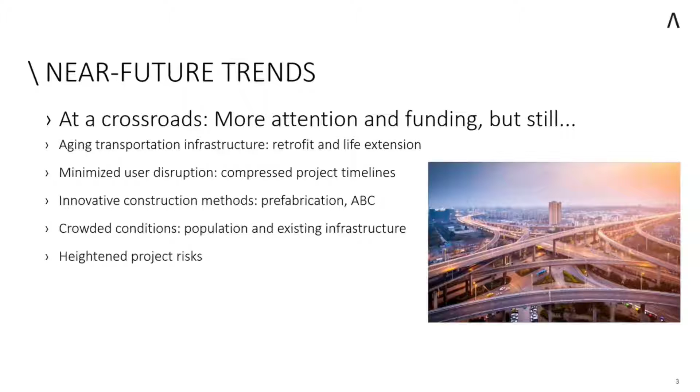The flip side of this, of course, is that these methods are being employed in increasingly crowded conditions, both the population having grown considerably and the existing infrastructure around these bridges that may need to be replaced having grown considerably. So utility conflicts and other infrastructure conflicts, as well as impinging on a great many number of neighbors, is a serious concern. All of this brings heightened project risk. Talking with the stakeholders that we deal with regularly, many of them are highlighting the need to control cost and schedule more stringently than ever before.

We have recently invested a good sum of money into the job of getting a lot of our infrastructure and replacing the most aged bits of it. Nonetheless, there's also a lot more infrastructure out there over the next 40 years to be replaced. That, again, brings increased complexity of design and construction to meet the needs of ABC, prefabrication, tighter fit-up requirements, more automation both in the field and in the shop.

All of this is really intended to allow us to increase worker productivity, both on the design side as well as once we get to construction and fabrication, and even going into the future, better optimizing our allocation of resources for maintenance, asset management, and inspections. That in turn means that when working on crowded locations, using more automation and prefabrication for more complex designs on a smaller footprint, we have a much increased need for coordination and change management, better data exchange, and better data longevity.

How many people have worked on a project where the as-built is a set of scanned, hand-drawn documents from 1955, where everything is illegible, the scan quality is terrible, and we can barely parse out what's there now.

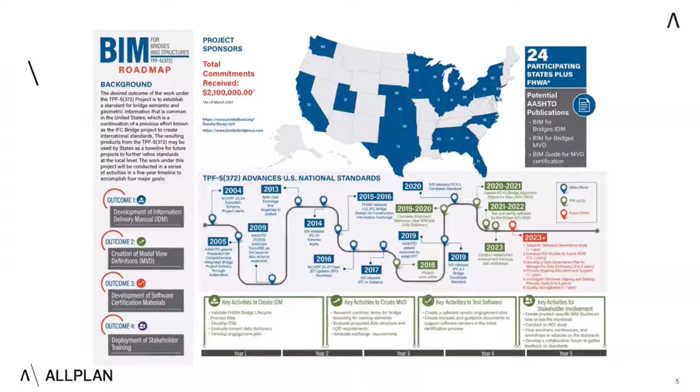Touch a little bit on IFC 4.3 because that's going to be threaded throughout the rest of this presentation. IFC 4.3, IFC being Industry Foundation Class, is a neutral and non-proprietary data format intended to facilitate project delivery in open BIM and open 2D, open data formats. It's intended as a way of allowing DOTs and EORs to work in almost any tool from almost any vendor, pick the best tools for the job on a given project, and still collaborate with one another, communicate with one another, and ultimately deliver into a common file format.

This IFC schema has been greatly developed for buildings. AASHTO is working with buildingSMART and the DOTs to extend that schema to the modeling of bridges to start, and ultimately then from there into future schemas that will include things like roadway, rail, and tunnel.

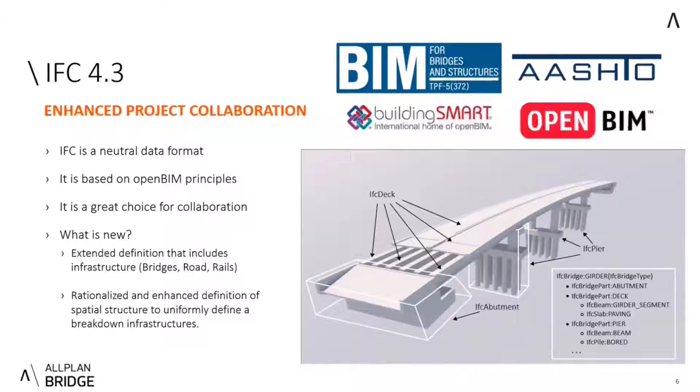At this point, I'll turn it over to my colleague Jalpesh, who's going to discuss what digital delivery is from the engineer's perspective. Jalpesh?

Thanks, David. In terms of digital delivery, David quickly went over why now and ways to get there. So what I want to cover is how our customers today are using digital delivery, using the tools that are currently available on the market.

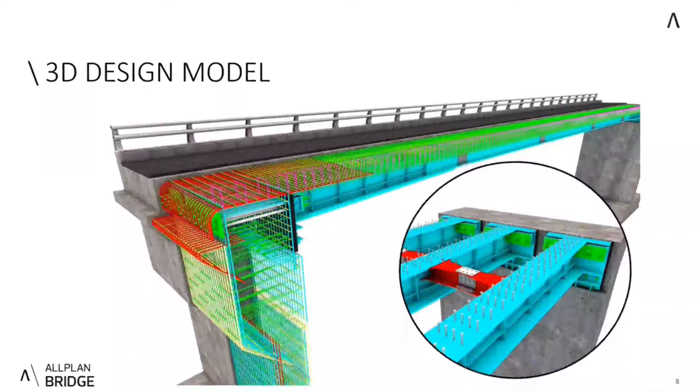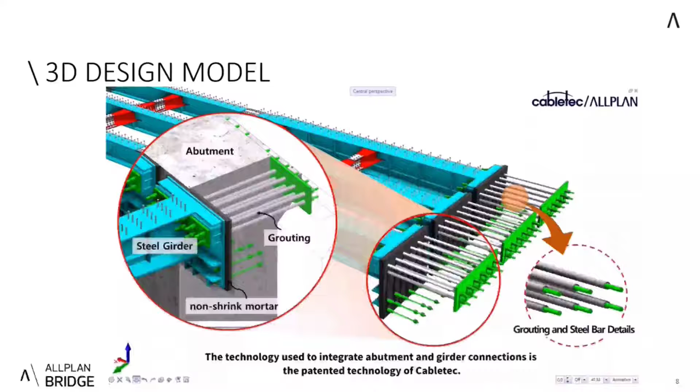The first thing that comes up when you talk about digital delivery for the majority of people is a 3D model. Well, that is correct, but it doesn't necessarily have to be a 3D model, it's a 3D BIM model. A BIM model is slightly different than a 3D model, in that a BIM model has the 'I' in Building Information Model, where the information is the key component that is part of the model. That is what helps make it digital and consumable in various ways.

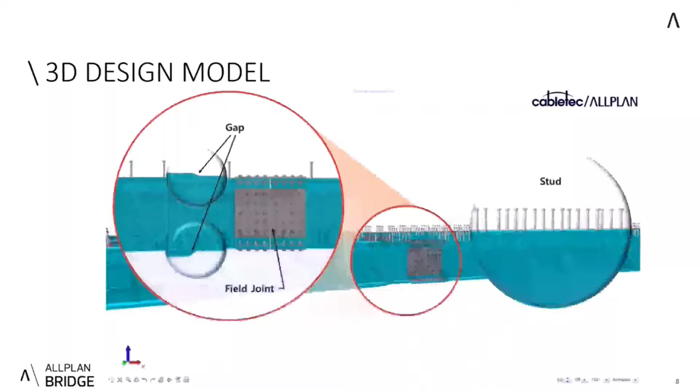So when you create a 3D model, some things you need to be mindful of are the level of information included in it, the level of detail that needs to take place in the model, and also the data structure, because we want the data structure organized in a way where the end receiver of the design can consume the model in a format they're comfortable with.

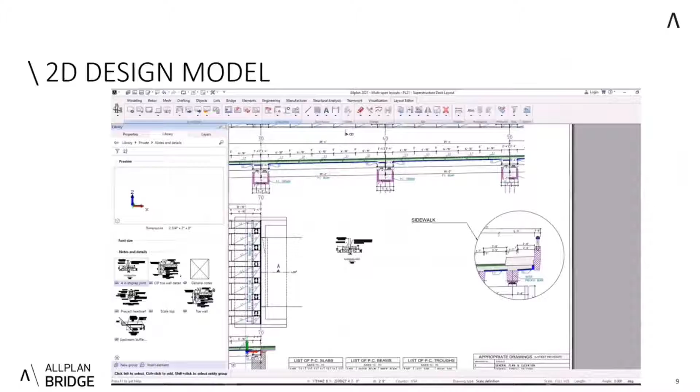So how do we do that? Again, a 3D model is a good starting point where you could put the geometry in a 3D format, but it doesn't necessarily always have to be 100% 3D. We could combine it with a little bit of 2D design as well, or do the whole thing in 2D design. Some examples here are 2D details that we're all familiar with, such as standard details a DOT might have specified.

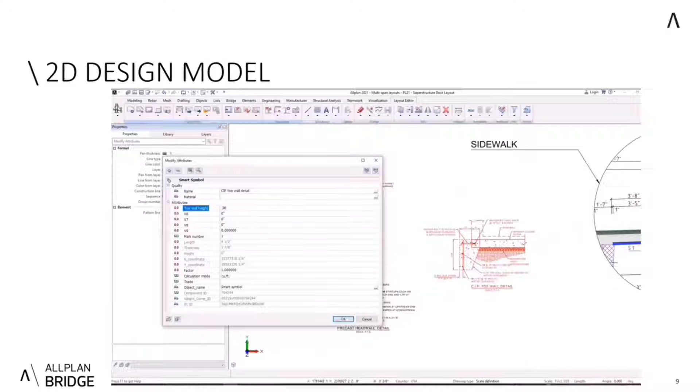What we can do is attach information to it. In this specific case, we've attached attribute criteria where we include a range for the toe wall height. This helps us control the design and also control the limitations of that detail. That information is crucial for digital delivery, because we're not only controlling the quality of the design, but also storing that data in a digital format that can be validated on the go during the design process. Later down the road, we can extract that information when needed for different tasks.

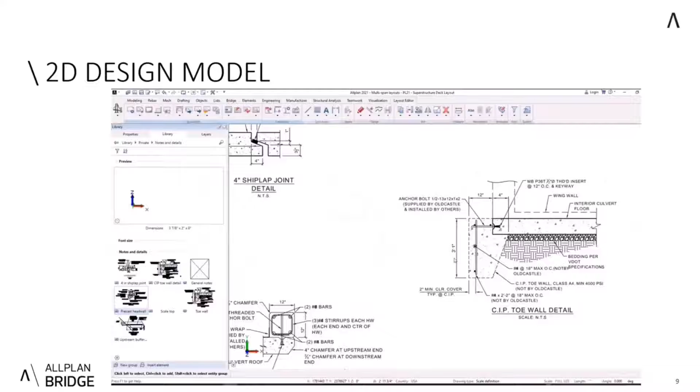Once you have the 3D model, the benefit of a 3D BIM model is the visualization that can be generated for it. Having that third dimension puts a whole new twist on design, where you could use that data in multiple formats in different ways than you would be able to if it was just 2D.

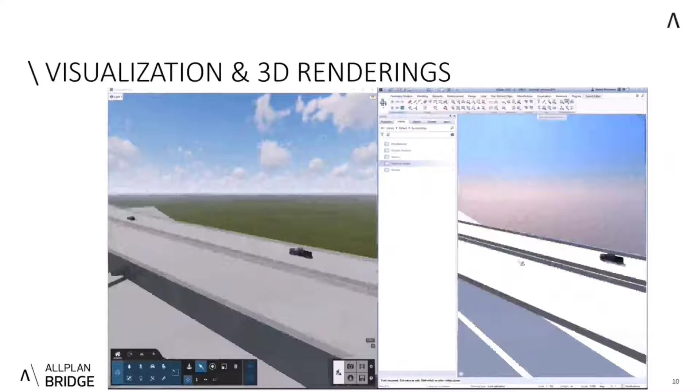The 3D component makes it so realistic that we can integrate with other platforms that project teams are already including in their design process. A perfect example here is the design team modeling the bridge and coming up with the layout and design on the right-hand side in ALLPLAN, where they're mainly focused on the layout of the bridge and the material properties, as well as the detailing and structural stability.

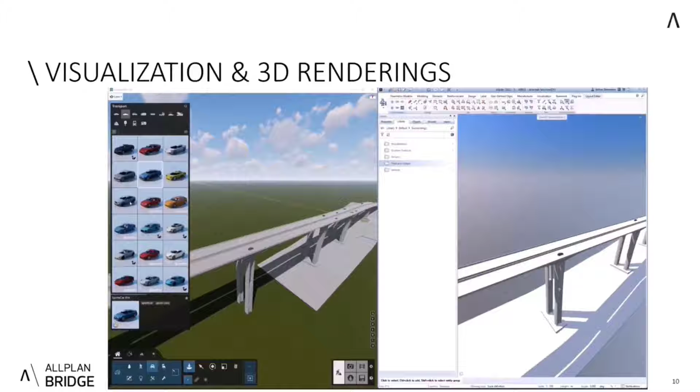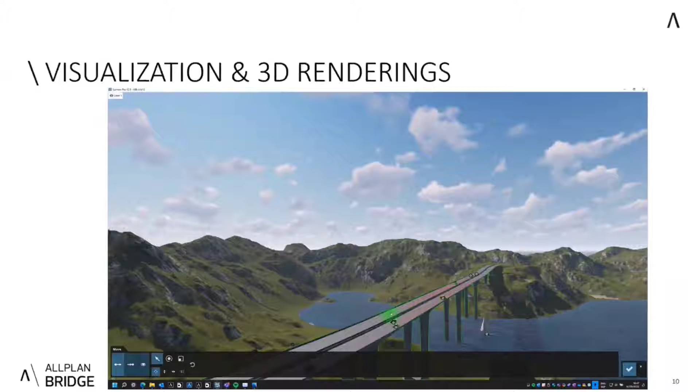At the same time, we have other aspects of design that play into overall project delivery. One of the main things here is doing renderings and visualizations for community engagement, to make sure the client understands what they're receiving and the community is on board with the final product. And what we do many times here is create 3D renderings.

The key thing is if we could utilize that same model to do those renderings, we want to do that as much as possible, because it helps us improve efficiency and accuracy. I think that's a theme that's been threaded through almost all the conversations we've had with folks in the industry - we do all of these things anyway, we just do them separately and at great expense.

Exactly. And right here is another quick example of that same process. We usually go through a design process, create our design plans, sign them off, and then send it to the contractor, where the contractor will coordinate that design with the manufacturers for the components needed for construction.

If we were to define all that design digitally in terms of a 3D model or a 2D detail with attribute data relevant for those components, we could reuse them without having to regenerate that information.

In this example, we were able to take the 3D model, and the 3D model had a detailed model of the reinforcement, which included attribute data in terms of rebar shapes, type, and all the necessary information needed to generate that reinforcement or manufacture it through a bar bending machine.

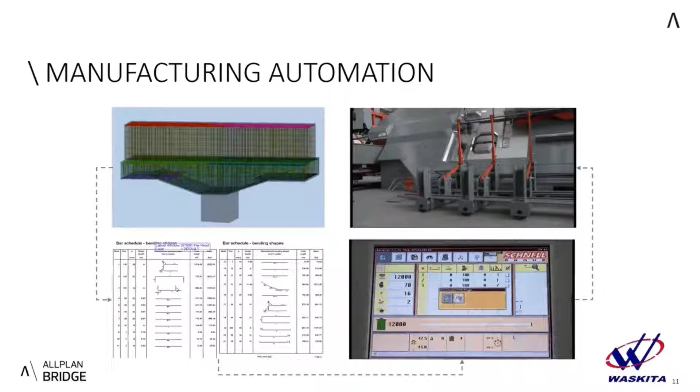What we were able to do, because the information was available digitally and not in paper format, is manipulate it into a format that a rebar bending machine can understand. So again, that data flow was maintained - we took the 3D model directly through ALLPLAN, creating an output file understandable by the bar bending machine.

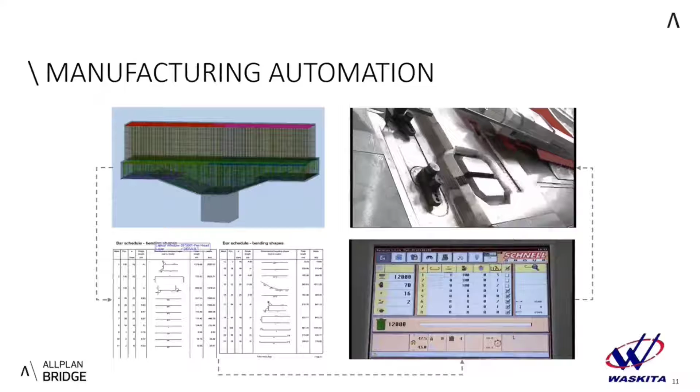So at the end of the day, what we're seeing in 3D virtually is what we're producing, and we've validated that design in 3D because we had that third dimension and basically did a virtual construction of that element. Which brings us to the next topic, the review process.

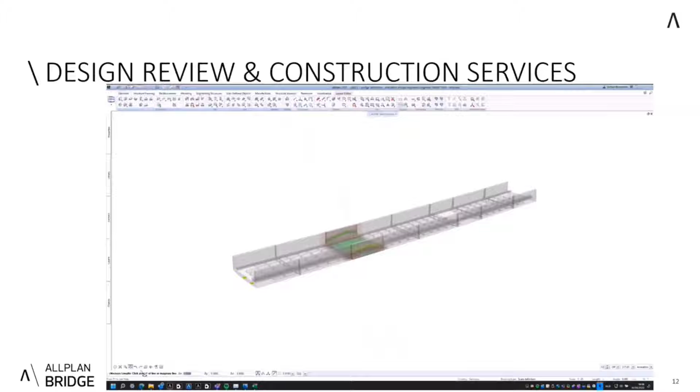The benefit of a digital model is we want to review it and use the attribute data and metadata behind the model to make educated assumptions, as well as define construction elements in a way that the design is constructible. In that process, we go through a lot of different variations in terms of how we review that design.

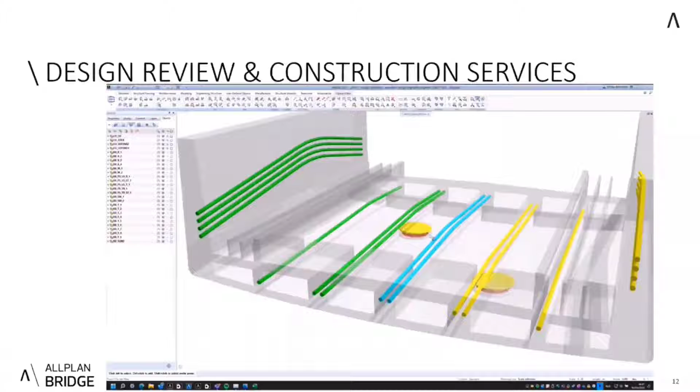Different components of the bridges are reviewed by different parties in the team, so sometimes all the information plopped onto a sheet might not be relevant for them. The benefit here is if you have a digital model and attributes associated with those models, you could quickly filter it and create views which are relevant for the reviewer.

In this case, the main focus was just tendon geometry review, and they were able to go down to the tendon geometry and hide the other components to see how that geometry interacted with the other parts of the bridge. Additionally, you're able to turn on those components, like the example here where we had the reinforcement turned on, where we could see the coordination between the reinforcement detailing and the tendon geometry.

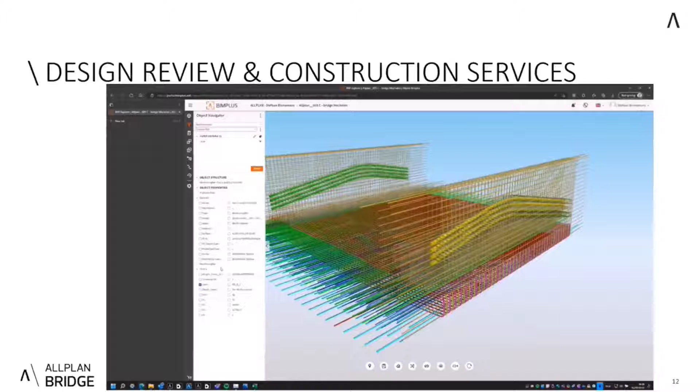The benefit here is you could see on the left-hand side, we have access to multiple ways of consuming this data through different filtering methods. In this model, the reinforcement has been segmented into different layers, and we could turn those layers on according to that placement. This helps us understand how that placement is going to take place in the field and the conflicts it might entail with the current design.

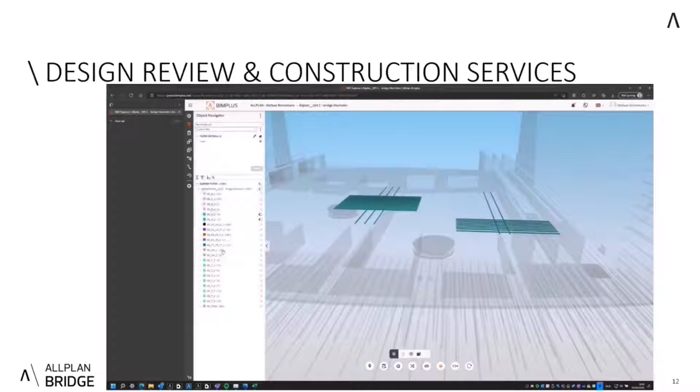The additional benefit you could get with this data structure is that we could share the same information in the field, and the field engineers and the contractor can see the sequence these reinforcements need to be installed in. If there are some conflicts, they could be aware of it ahead of time, so they could contact back to the design team and get validation and verification in terms of the intent of the design.

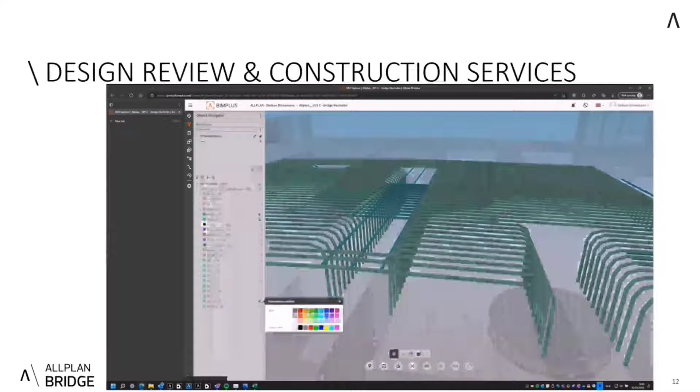Over here, you have that flexibility of consuming that information in a manner that you're used to, or you could create customized workflows from that digital data in a way that is relevant for your field or your segment. A quick example here, they're using that same model.

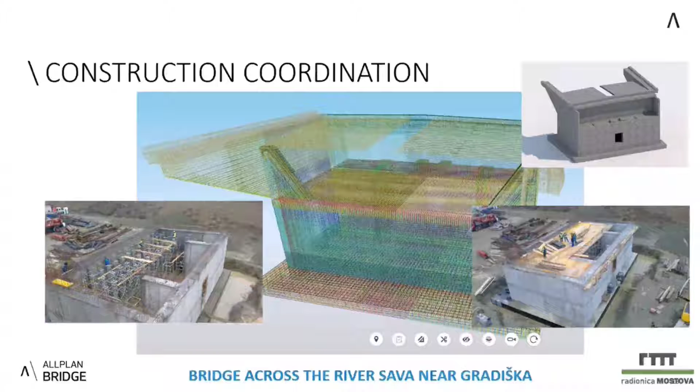Again, what we were seeing earlier was a Bimplus platform, which is available online. The key benefit of the Bimplus platform is that because it's a URL-based platform, it is accessible anywhere in the world. So the contractor in the field, the designer in the office, all have access to this model in a centralized location, and they could share information and collaborate as needed.

And this helps out in the construction site, making sure that transfer of data from the office to the site is streamlined and accurately available when needed.

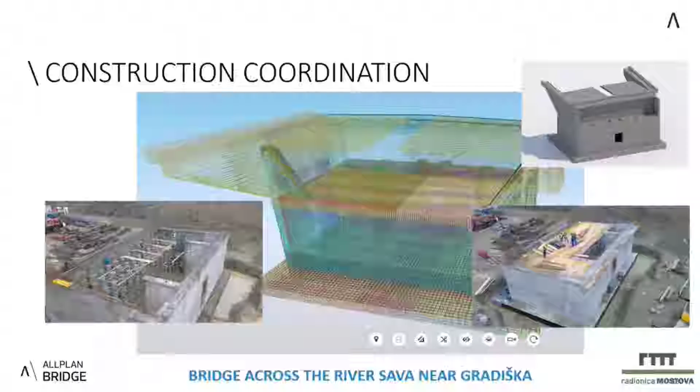So far, all the examples we looked at, when we talk about digital delivery, people have an assumption that all of this is implementable only in new construction. Well, that's not the case. We could also do that with existing structures.

Different formats of digital information include point cloud or LiDAR scan. In this example, we were able to do a LiDAR scan of an existing structure that had to be modeled within our BIM environment. That way, we could do some coordination of modifications on the existing structure.

This would be the same example if you were to model as-built for an existing structure, if you wanted to do, let's say, a deck widening or some rehab that needed to take place. What we can do is first do a LiDAR scan, which provides our survey data and the geolocation of all the different components that make up the structure.

Then with our partners at Scalypso, we were able to coordinate the placements of these elements in the 3D geolocation and build a digital twin almost within ALLPLAN. You are able to select elements within the point cloud to place your elements, and then a 3D model was generated in ALLPLAN, similarly to what we saw with the visualization, where we had ALLPLAN on the right-hand side and Lumion on the left-hand side, and we were able to integrate seamlessly.

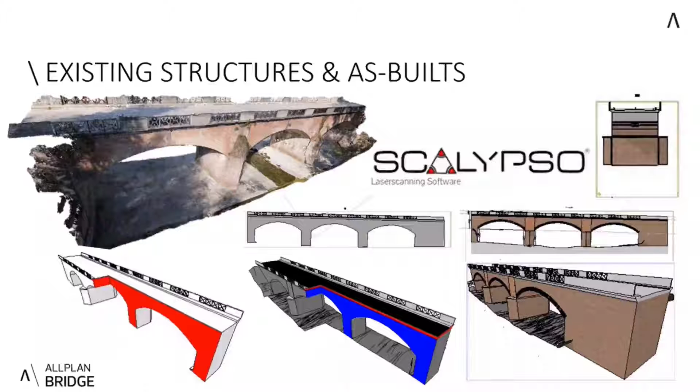Amusingly, I was just having a conversation about this yesterday, and I was under the impression that we didn't have a good workflow for it.

So back to the customer. What we want to do here is make sure that we understand the true meaning of digital delivery. Yes, 3D has a big component, the BIM aspect of it, but there are multiple formats this can be achieved in. A good example here is a recent pilot project we're about to wrap up with our partners at Pennoni and DelDOT, project 1-447 over Taylor's Bridge Road.

The great thing I like about this is that their focus was all digital delivery and how far can we take it. This also didn't have a specification that it had to be done in a single platform. It was more like, how can we use the best tools available on the market, tools that the teams are comfortable with, and exchange data in an open format.

So over here, we have a quick example: on the left-hand side, OpenRoads, and on the right-hand side, ALLPLAN Bridge. The team was able to coordinate the two models seamlessly with each other through the open data format IFC. Additionally, for information that was not possible to transfer through IFC, we were able to do that through a native format that ALLPLAN was able to generate as a 3D DGN.

The great thing here is that we could do some volumetric checks. They have an existing bridge in place, so they were able to produce volumetric clash detection against an existing structure and make sure that layout was sufficient for constructability reasons in terms of clearances from existing structures.

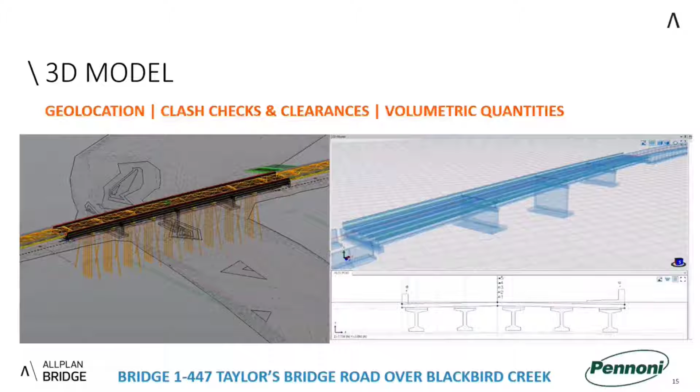The open format of IFC and the native file format of DGN, both of which can be exported from ALLPLAN, played a big role in that collaboration effort of using multiple platforms of preference while still having the ability to streamline the data exchange workflow.

Further, we were able to take that BIM model, and again, it was not just a pretty 3D model, it was actually an intelligent 3D model where the detailing was also done in a sophisticated manner, with a lot of attribute data associated with those elements.

When we create plan sheets, we have a bunch of notes that come into play. That same notes can be applied to an attribute set within ALLPLAN. And the benefit of that is that the attribute data can drive some of the production, the 2D production that is still

necessary in today's world. In this scenario, we were able to automatically generate our quantity tables and rebar schedules from the 3D model and the attribute data associated with it.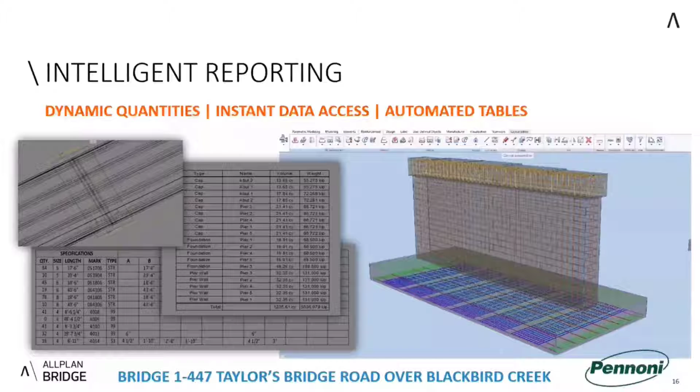That streamline of information makes sure the information is flowing smoothly from one process to another, and then you truly have a centralized model. It's not only within ALLPLAN that you could consume this information, you could actually export it to other formats like Excel or Word to create customized reporting as necessary.

And then, of course, the 2D plan set. Plan sets are here to stay, the whole industry is accustomed to this process. There's going to be portions of the process in your digital delivery that will have to be accomplished in 2D, so we want to make sure we have that functionality as part of that workflow. Yes, we have ambitious goals of going 100% 3D, but it's still time before we get there.

So again, we keep that in mind. Digital delivery does not mean a 3D model. It means a way of providing the design intent in a manner that the information can be consumed by the receiver in a way they're accustomed to. So it could be 2D, it could be a 3D model, it could be a rendering, it could be a 3D PDF.

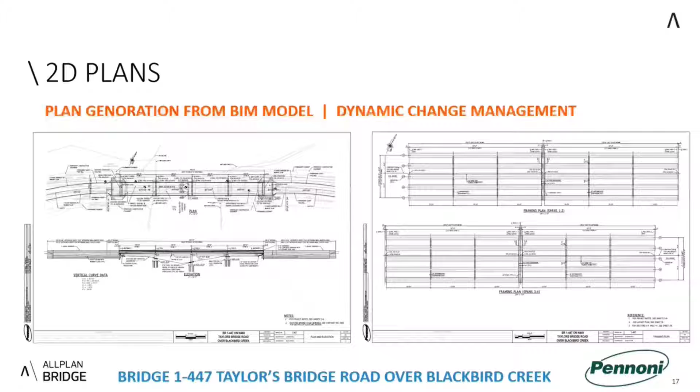All of that is possible when you have a data-rich BIM model, which we have in this case, where we were able to take that centralized 3D model and create our reporting in tables, as well as these sheets that we see right here. A lot of these texts and labels that we're seeing in the plan sheets were automatically derived from that attribute data, along with these tables.

So you could pull northing and easting elevations, true elevations from the model, and that way you have a realistic virtual model of the design available to you. And you could start reducing risk and get the deliverables that are necessary at the same time.

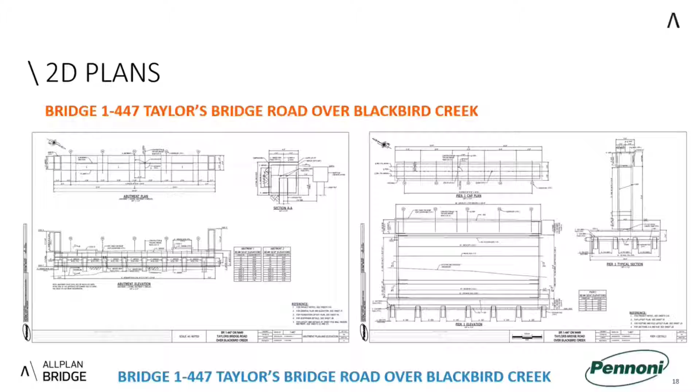So you're not adding work on top of it where you're doing a 3D model while also having to do a parallel 2D workflow. No, we have a 3D workflow where the plans are the byproduct of that 3D workflow, and we're not generating them on the side, which is the true power you get from a digital design, because that data is available digitally, and then we can generate any output that we want in a format that we need.

To get more into what the ALLPLAN environment is, we're actually going to do a quick webinar coming up in the near future where we'll walk through this workflow. But I wanted to give you an idea that there are multiple options of going in and out of a workflow, which is what makes digital delivery powerful.

That data can come into different platforms and leave the platform when needed for a specific task. In our scenario, we have three core platforms, BIMPLUS, ALLPLAN, and ALLPLAN Bridge, which are all integrated with each other. During the design phase, we could take that data back out of this environment into a different workflow. More on that coming up.

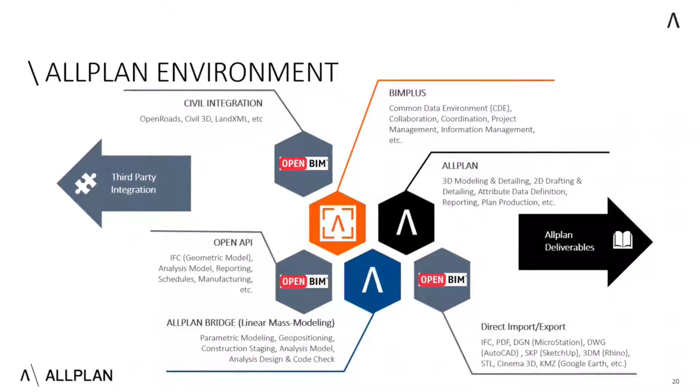So if you're not already submitting deliverables as IFC models, then producing an IFC model will probably seem a little daunting. Thankfully, with ALLPLAN Bridge, we're working to make sure that the process of creating an IFC model and more digital deliverables is as seamless as possible, and to a large extent occurs naturally throughout the modeling process.

Even from the start, every time you start a new ALLPLAN Bridge project, one of the first things it asks you after where to save the project is what the IFC bridge type is. You can choose from a list of selections here, choose not defined, or even your own user-defined option. You'll see these drop-downs a lot throughout the process.

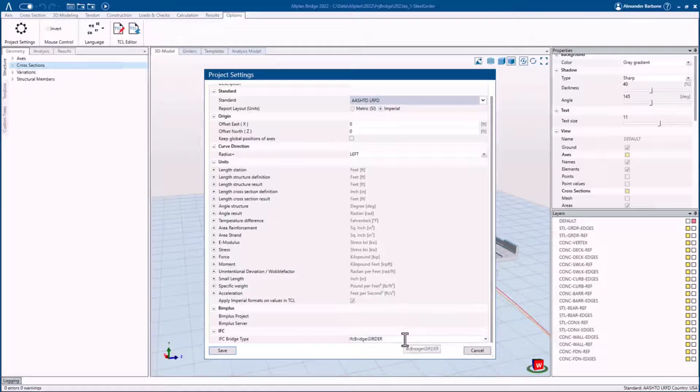Of course, even if you started your model and didn't include this to begin with, you can always change it simply by coming here to the options and project settings. Besides all the values associated with the units you're using, down at the bottom here, you'll see an opportunity to specify or change the IFC bridge type.

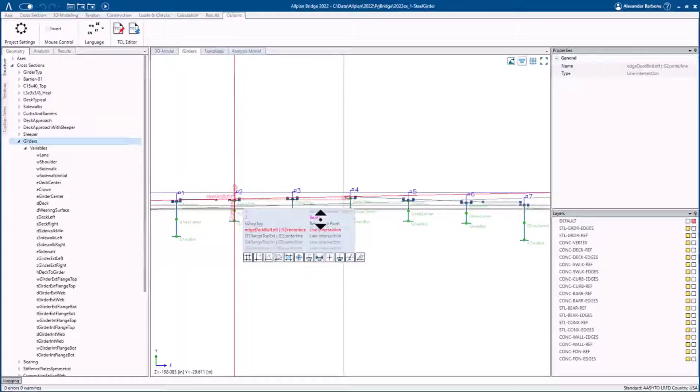So you'll see opportunities to enter the IFC entity values throughout the modeling process. For instance, every time I create a new structural unit in a cross-section, I have the opportunity to specify what the IFC entity value is. Let me select one of these beam values. We can see in the properties over here, I have an opportunity to enter the IFC type and the IFC name, and we'll notice these include a large variety of built-in options.

You'll notice for a lot of these there's a user-defined option. It's not immediately obvious, but you can actually edit all of these values—they're just a string of text that you can edit. So if you want to choose an option that's not included in this list, you're free to enter your own values. I do want to change this one back to beam, however.

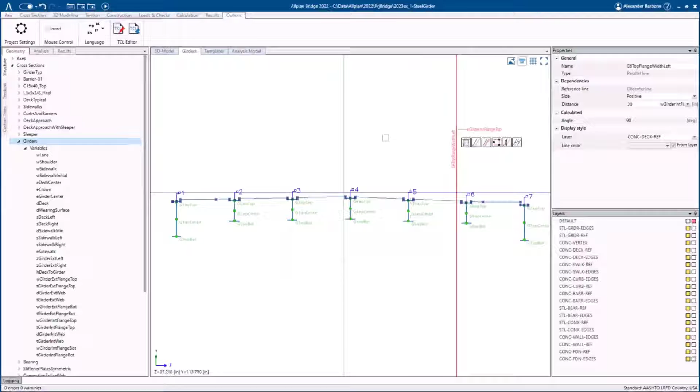You'll see these show up again when you start the project as you're creating your cross sections, and you'll see them when you create structural members as well. Let me come back here to the 3D model and select, for instance, these steel girders. You can see here, coming to the properties, I have the opportunity in this case to enter the entity value for the IFC bridge part type. Again, we try to make this process as easy as possible and make suggestions to you along the way for what are appropriate values.

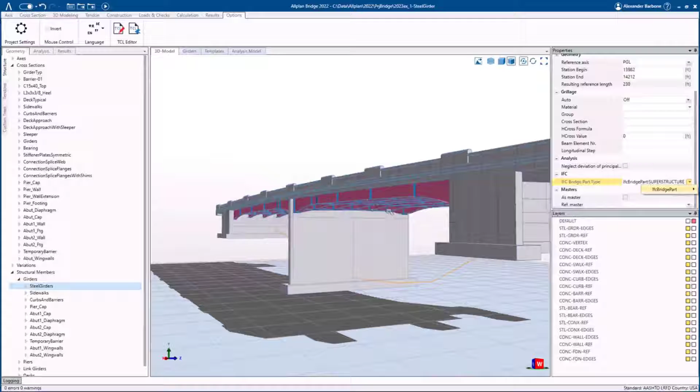So you can see these are showing up just in the properties palette as I'm selecting objects—they'll show up throughout the modeling process simply by interacting with the objects. It's not like I have to go to a hidden menu somewhere and specify all of the IFC values at once, or create a configuration file. I can just plug in the values as I normally go about the modeling process, and that's especially helpful for engineers and designers who aren't experts in the IFC data schemas.

Just follow the prompts on screen—it's really that simple. And if you're breaking up who's working on which parts of the model, then you also have the opportunity to have the people creating those objects choose the appropriate IFC values.

So you can easily divvy up the work rather than waiting until, say, the end of your modeling process where you have to go through and start entering these values. You can just do it along the way. And that's not the only way we're using IFC values.

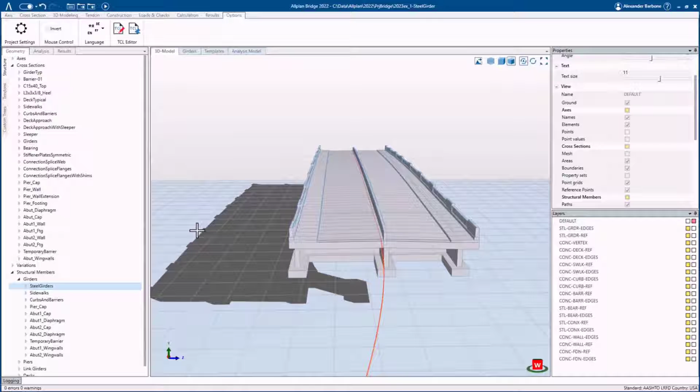Actually, we have a new feature here in ALLPLAN that we're referring to as attribute sets. So this is a really interesting functionality because what we can do here is automatically assign some attributes depending on what sort of IFC object an ALLPLAN object is assigned to. So let's take, for instance, this girder right here. I can see there's already a collection of attributes assigned to this girder.

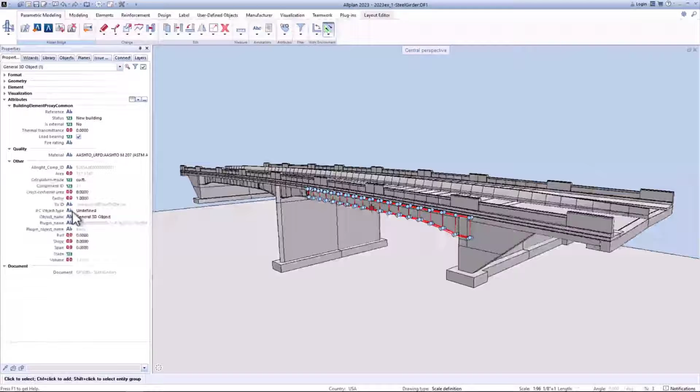One of them you'll notice is this IFC object type. So in this project, I am using attribute sets. So if I were to come here and change my IFC object type from undefined, which is just a default value, to IFC beam, we'll notice that this building element proxy common, this group of attributes up at the top, will change. I'm going to press enter, accept the values.

And when I look at the object again, you'll notice that I have a category. It was replaced with beam common, and I have now a whole list of new attributes. Some of these might be the same because they're fairly common, but I can see, for instance, that I have this attribute called unit weights, and the value is 0. I can also see that there are some other attributes here, major bridge assembly and national bridge element, that aren't correct either.

But now I can be more aware of them simply by adjusting the IFC object type, and then the attributes are selected. So now I can come in here, and this one should be superstructure. And then this value should be a girder beam made of steel. The unit weight of steel, we'll say 490 pounds per cubic foot. Now we can see even my weight is being calculated correctly. So all of that stuff became really obvious just because I'm using these attribute sets.

I already configured them the way I need to for this demonstration, and by changing the object type, I now am prompted to notice that there's a few attributes that maybe weren't populated correctly. So it could have been extra work for me to go through and specify all of these IFC object types to make sure that my IFC model is being generated correctly. But that's not really the case here. This is now part of my quality assurance process. I know that this is just the thing that we do to make sure that we have the correct attributes loaded.

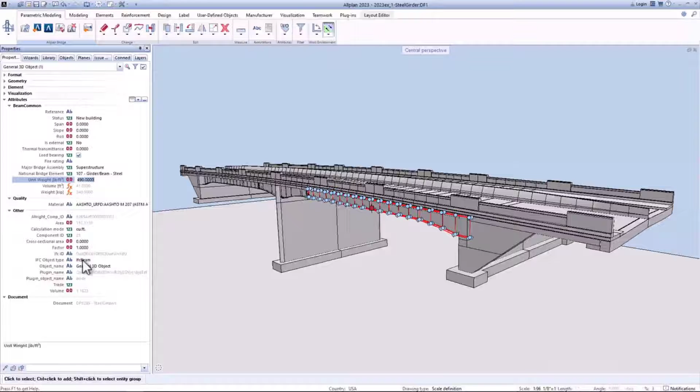Now, these attribute sets are configured either on a project-to-project basis, or you can create one to share between projects. So I can view the properties for this specific project, and I can see that what I'm using here is the Office standard. So this is just the default one for my organization. I can also create project-specific ones. I can use some of these default ones, the IFC common. I can also just turn the feature off altogether by selecting none. And I have the option as well of importing from BIM+.

So this is extra helpful for situations when you have people that are going to be setting up this process. They don't even have to have ALLPLAN open. They can actually manage the whole attribute set process directly in BIM+, and then it can be loaded into ALLPLAN for the modelers that are working in ALLPLAN to specify these values. So you can manage all of this information and set up this quality assurance process outside of ALLPLAN and import that information in. I'm going to keep that at the default here and close out of these menus.

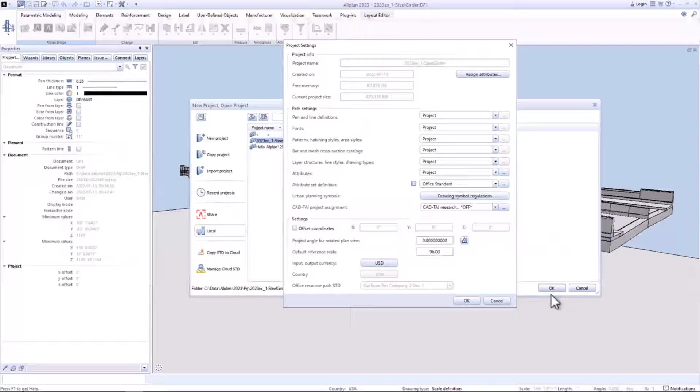And then we'll take a look at, since we're talking about quality, some features for quality control in ALLPLAN Engineering. So we know that, especially for engineers, you have to have a way of performing quality control on a BIM deliverable. And we also know that engineers love their spreadsheets. Thankfully, there is a way in ALLPLAN Engineering to simply export attribute information to an Excel spreadsheet. So I can start the export attributes command, and I can see here I've got plenty of settings. One of the most important ones is this report template.

There's obviously a lot of data involved in this model, and I probably don't want just an enormous list of everything that's applied to this project. This report template gives me the option of selecting which attributes I want to export, and then the on-screen prompts will allow me to select a certain range. The report templates, there's a lot to choose from. There's plenty of defaults here.

I've also created some of my own, and these are very simple text-based files. If I open up the one I'm using for this example, it's just an XML expression. There's a bunch of control lines here and there, but really the only thing that's important is this list of attributes in the middle.

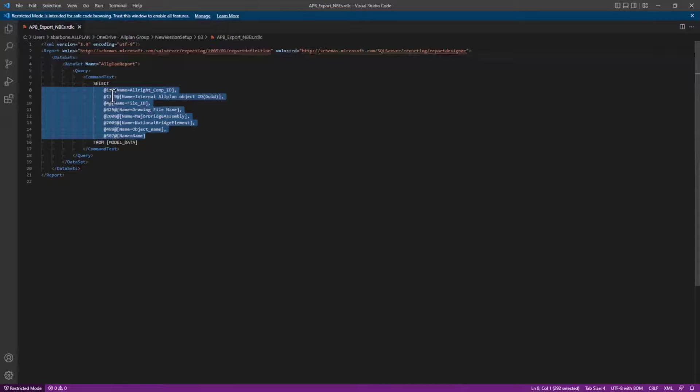The syntax is the same for all these RDLC files during this process. You can easily come in here and just enter the attribute numbers that you want to export and what the names of those values are. Close this and return to ALLPLAN, and I'll indicate that I want to export this information to Excel and then start Excel immediately.

I'll just select all the data. ALLPLAN will immediately export that information to Microsoft Excel, and now I can easily browse through the spreadsheet and take a look at the attribute values that were assigned to the objects that were selected.

So now I can get that information easily out of ALLPLAN, but I can also send it back in. One nice feature about this process is if I notice any mistakes in the attribute information, I don't have to go back to ALLPLAN to change it. I can do that right here. All I have to do is edit the file and import the information back into ALLPLAN.

For instance, I can see that I've got these objects on my drawing file that I know includes only objects for abutment 1, but for some reason they're assigned as a deck slab, and the NBE is indicating that it is a reinforced concrete slab.

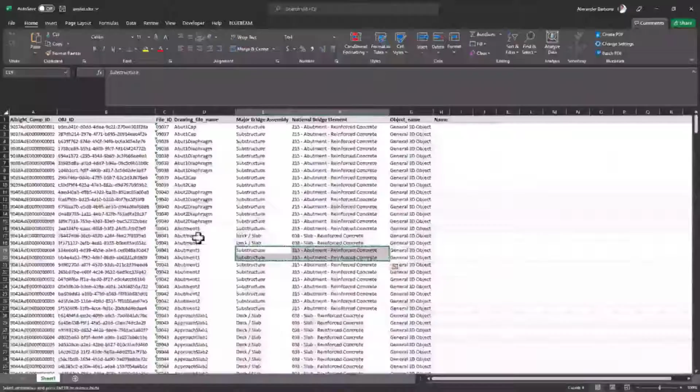So I'm just going to copy the correct values from another object in that same drawing file, and we'll overwrite those. Simply save the spreadsheet, close that down, and then press the import attributes command here.

I can choose that same Excel file that I created moments ago. I'm also going to check this dialog box for comparing data. That lets me take a look at all of the changes that I'm about to introduce, so this gives me one last check instead of just blindly copying in all that data.

Now I can see, for instance, that I am going to be importing this specific information. The attribute major bridge assembly is going to change from deck slab to substructure, and I have the option of choosing whether or not I actually want to import that information. In this case, I know I want to import all this information, so I can just press OK.

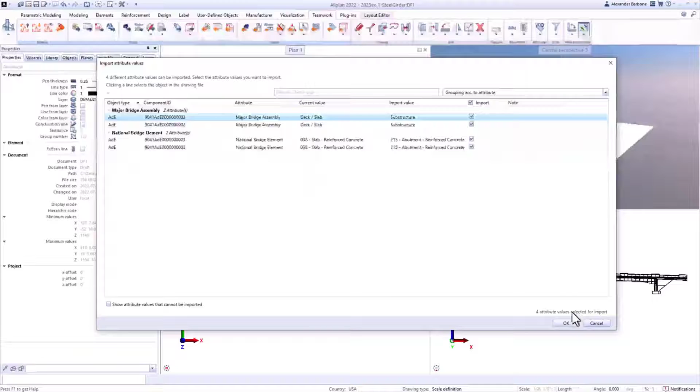The process will unfold, and now my attributes are correct. So this is a nice process because it lets me take data in and out of ALLPLAN. We saw that a few times just in these few minutes, that information can be brought to other programs and applications.

That really lets me, as an engineer or designer, choose the best or maybe even the most comfortable tool for whatever task is at hand. I'm not restricted to working exclusively within ALLPLAN. The point is to have an open environment where we can exchange information fluidly.

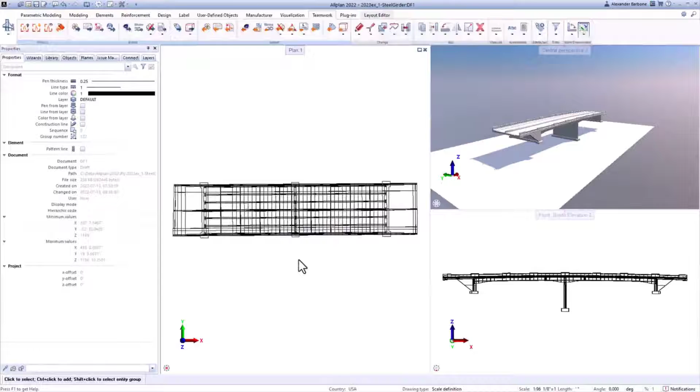And of course, we are realistic here. Not everyone is going to be ready to accept an IFC model as the only deliverable for an infrastructure project. There are plenty of agencies out there that are still requiring that 2D deliverables be included at the end of a project. Of course, ALLPLAN provides you the functionality to create those 2D plan sets.

Just taking a look at a few section cuts that were created from the model we've been looking at, I can easily create drawing sheets within ALLPLAN and then export those to a variety of formats. I can export and print these, for instance, to PDF and have a full PDF set that I create from my BIM model if a 2D deliverable is necessary.

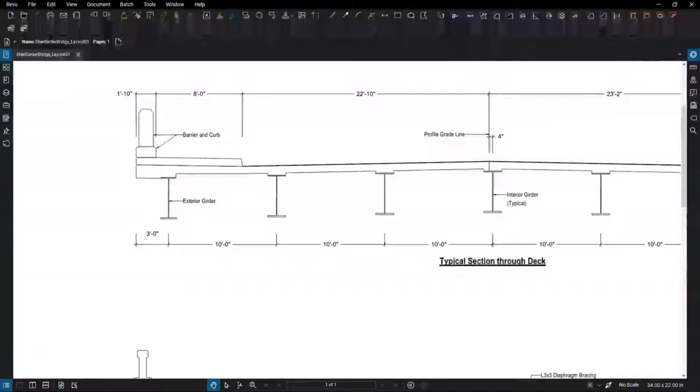More advanced deliverables might also be necessary, such as 3D PDFs, also a functionality that we have in ALLPLAN. I can't promise that every PDF viewer will be able to open and view a 3D PDF and allow you to navigate and zoom, but it is an option to create 3D PDFs. Just make sure you've got a viewer that can handle that sort of file extension.

Of course, sometimes we need to export even the plan set to a variety of different formats. For instance, maybe an agency is requiring that they be produced in DWG or DGN. We have that functionality as well, and we actually have the option with this command here, the ALLPLAN exchange layout distribution.

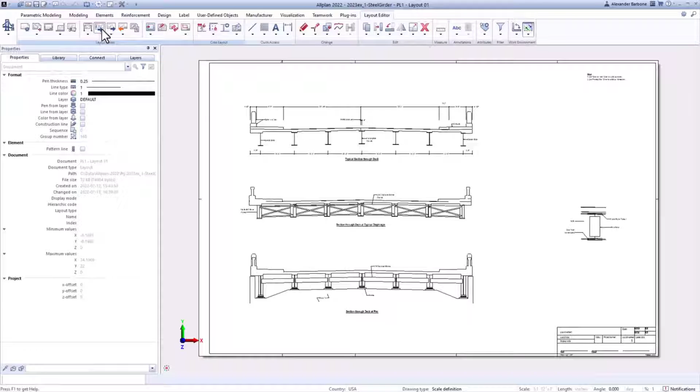I know that's a mouthful, but what it does is pretty robust, and it will allow me to set up an export that sends this information to a variety of different file extensions. So what I can do is choose which of my layouts, so those are my different plan sheets essentially, and choose which formats these will be exported to. And I can choose multiple, so I can export the same layouts to PDF, DGN, and DWG at the same time. So select here, and I can see that there's even some options that I hadn't selected.

I can also specify what my exchange favorite is. So this basically maps information from the ALLPLAN system to whatever system you are exporting to. So for instance, an exchange favorite might remap ALLPLAN layers to MicroStation levels. So that way I can set up that configuration once and then be assured that every time a drafter or modeler runs this export, as long as they choose that exchange favorite, they'll be able to export that information accurately and create a deliverable that looks indistinguishable from one that was created natively within, say, MicroStation.

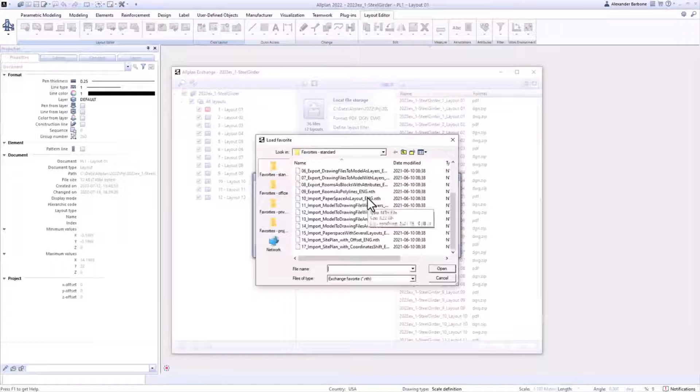I can see here that there's also a variety of exchange favorites to choose from. Throughout ALLPLAN, you'll also see options for saving and loading favorites. So at the beginning of a project, or maybe the first deliverable, the 10 or 30%, I have the option of coming in here, setting this up, saving that favorite, and then allowing another individual to recall that favorite later on and produce a more recent version of what is otherwise the same deliverable set.

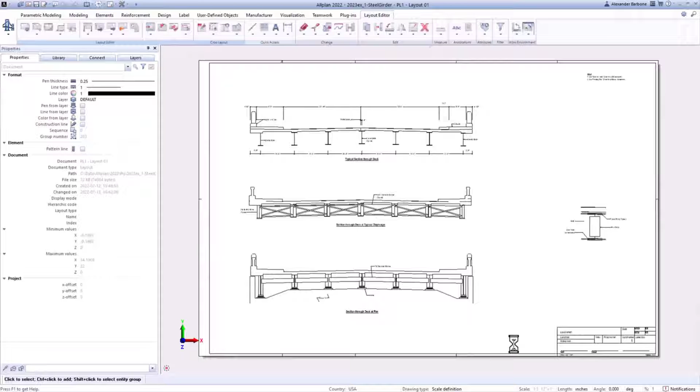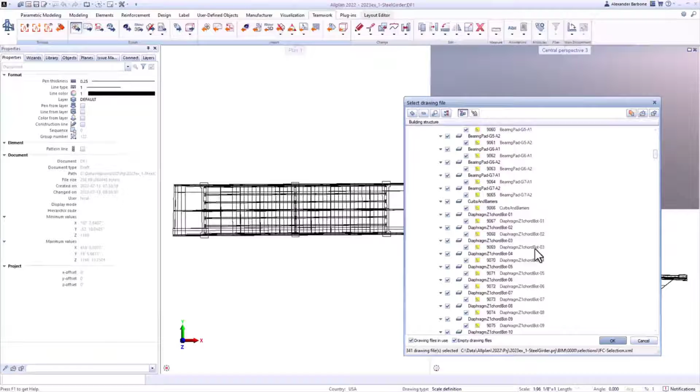For agencies and consultants that are ready to start using IFC, it is a simple process to export an ALLPLAN engineering project to IFC. So we have a specific command, export IFC data. Once you start it, the first thing it asks you is, well, which parts of your project would you like to export? So again, the option of selecting the whole or even just parts of it. You might want to break up IFC models for one reason or another. Maybe you just need to isolate them, for instance, based off of specific design discipline. I'm going to select all of them in this case.

And then I have a menu, and the first two things it's going to ask me is, well, where do you want to save the IFC file, and then what exchange profile. So in this case, the defaults are the different IFC standards. I can expand my settings as well. And when I do that, I have a lot more options here, and I can get pretty granular. But again, notice that whenever I'm done making these changes, I can always save this as a favorite and then recall it later on. So it's important to us to make sure that if you've already gone through a process once of setting things up just the way you like them, you can save it and then use it again later. That way you don't have to keep redoing the same tasks.

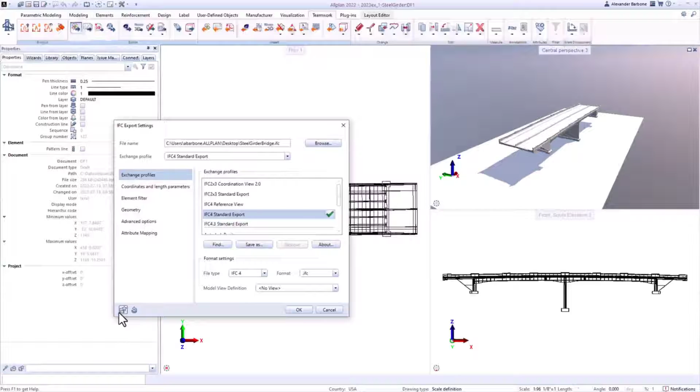Once the IFC model is created, you can go ahead and bring that into, for instance, your favorite IFC viewer. So switching over to another application here, I can see that this was the IFC model that was created from my ALLPLAN model. So now it can be freely exchanged with any individuals that have an IFC viewer, and there's a decent amount out there that are no cost to low cost.

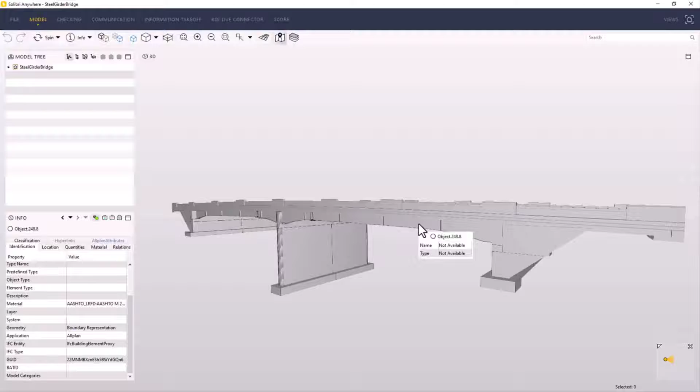Some of them just have simple features and only allow basic options such as measuring or querying some of the data here. So you can see though that I can select the objects within the model and then view their various properties and some of the attribute information that has been brought over from ALLPLAN. So for instance, I can see this material was specified when this object was created in ALLPLAN Bridge, and it becomes obvious at the end when I have created my IFC model.

Now let's take a look at BIM+, which is ALLPLAN's cloud-based platform. As a cloud-based platform, it's accessible via the internet, and it doesn't require the installation of any software in order to access and use. The benefit of this is that you can collaborate with users outside of your office or even your organization. So you're able to invite what we call external users to your project or to your entire BIM+ team, and then you can calibrate the permissions that they might need to have for either the entire team or even just a specific project. So you do have that level of control. The model that we're looking at right now has been created in ALLPLAN and exported directly to BIM+ from ALLPLAN.

We can actually import IFC models from any source. This isn't exclusively for modeled information generated in the ALLPLAN environment. If you can export it to IFC, you'll be able to import it into BIM Plus and view it alongside your other models. So if you have a design team producing a variety of different BIM models from different locations, maybe different offices or different companies altogether, you're able to export your IFC models, place them all in BIM Plus, and see the geometry side by side. You can use this as a centralized location for your modeled information.

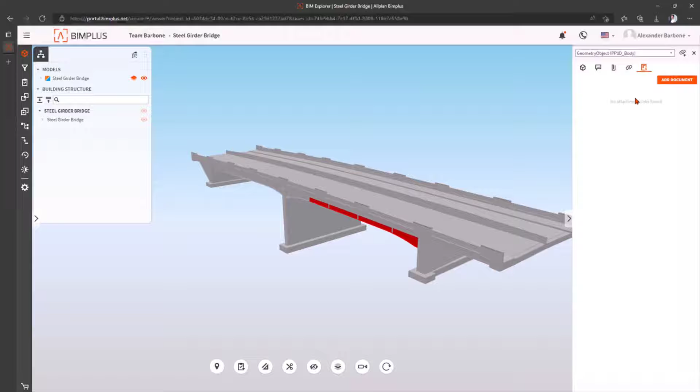The feature that we're most interested in sharing with you today is the issue manager. We know engineers need tools to review their designs, and a lot of the time it's necessary to formally document that process. I'm sure you're all familiar with the ways your organizations have developed procedures for completing the review process and ensuring adequate documentation that you can share with your customer to show that you're practicing a rigorous quality control process.

Obviously, we need something similar for digital delivery. That's where the issue manager comes into play. We're able to create a similar workflow, and in some cases it's a little more streamlined. For instance, with the issue manager, communication has been streamlined, immediately alerting the responsible individuals that there is an issue that has been identified. The other benefit is that we can collapse the schedule.

With a more traditional CAD delivery, a lot of the time in the review process, you've got one segment dedicated to engineers or other subject matter experts reviewing the design where it stands at that particular moment. Then after they've created all their comments and documented their concerns, it gets turned over to the CAD technicians or modelers to address those changes. The issue manager allows us to collapse that and have the individuals responsible for correcting those issues work while others are still completing the review. So one of the benefits of this BIM process is that we can collapse that schedule and complete the whole process sooner by doing some actions in parallel.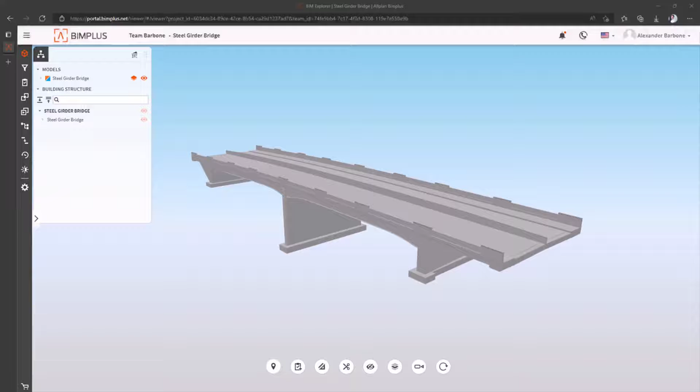So let's take a look now at one very simple example that we can create using the issue manager. It's available here on the left-hand side.

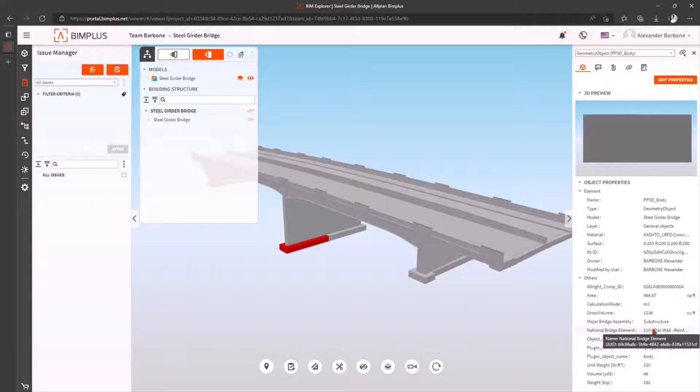What I can do here is select one of the objects in my model and create a new issue. The issue is related to a specific property that has been misentered. In this case, this National Bridge Element has been misattributed, indicating it's a reinforced pier wall rather than a footing. It seems the modeler selected the entirety of the pier object and assigned it the same NBE number, but we actually want that to be more precise for this footing element. With that element selected, I can create a new issue.

I'll give it the name 'wrong NBE assignment,' and then I can type in a description.

I can set a priority for this issue, and a status of open is automatically assigned to indicate it was just created. I'm able to assign a responsible individual, so this is choosing me as default, probably based on alphabetical order. I can choose additional people to be viewers on the issue so they can track its progress. I also have the option of choosing who to email about this issue, establishing a due date, indicating a type, and other tags, which might be helpful for organizing issues if you have a lot of them.

With these few simple things entered, I'm going to press the Publish button. That will create the issue within my list of all issues, and now we'll be able to keep track of it.

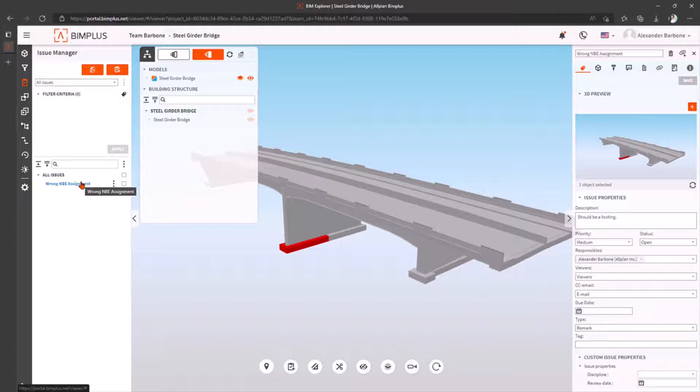Now let's see how the process continues from the point of view of a modeler who has been made responsible for addressing an issue. While working in ALLPLAN, I can access all of the issues generated in Bimplus through the Issue Manager palette.

I can also add additional issues from here, so if reviewers or engineers are working directly within ALLPLAN, they're able to add their issues here, and those become available within Bimplus as well. I can see I've already been made responsible for an issue, that wrong NBE number issue we created just a few moments ago.

From within ALLPLAN, I'm able to view all the information related to that issue, and I can even see the object has been identified on screen for me. I can read a description of the issue and view other similar information we had seen within Bimplus. That makes it very easy to select the object that has been identified.

In this case, I'm going to come over into the properties for that object and correct the NBE value here, changing it to identify it as a pile cap / footing.

With that done, I can return to the Issue Manager and indicate that the status of the issue has been solved, then save that change, which should be synchronized back within Bimplus in just a moment. This allows my reviewer to automatically communicate to me by assigning me as the responsible person, and for me to communicate back simply by updating the status to solved.

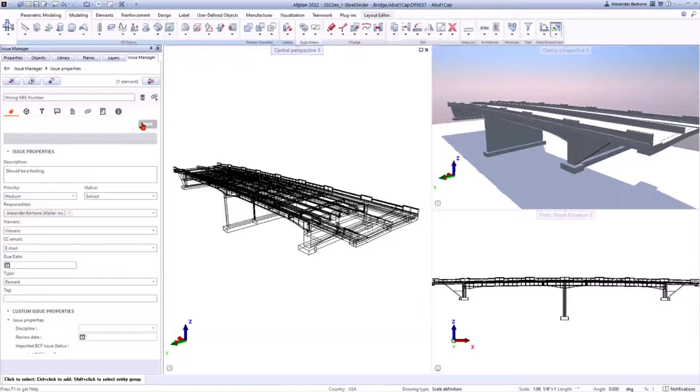Now let's return to Bimplus and view the issue. From the perspective of the reviewer working within Bimplus, I can come in here and take a look at my issues to see whether they've been addressed. In this case, I can see that this specific issue has been set to solved.

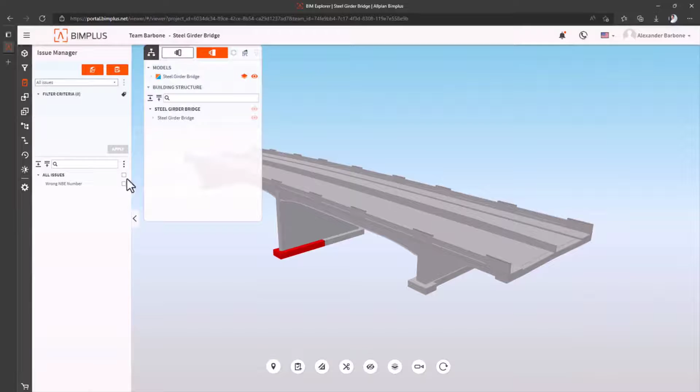I'm not limited to viewing issues one by one. I can select issues out of my list, maybe all of them or just a selection, and then view them in a tabular format. This can make it easy to check on the overall status of a whole list of issues.

This table can also be exported to Excel, which could be helpful if you need easy documentation to indicate you've completed a QC review, maybe during a particular deliverable milestone. So say at 60%, you can export all the issues you've created for the whole project so your client can be comfortable knowing you've completed your review process and they're receiving a quality deliverable from you.

So you can see that this Issue Manager is a relatively simple tool, but it addresses a lot of the needs of a review process.

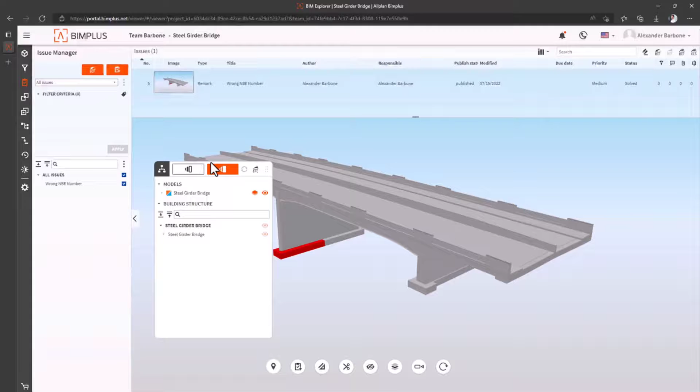It allows people to add their issues regardless of where they're working, Bimplus or ALLPLAN. It allows the people made responsible for those to see that they've been made responsible, and it really cuts out a lot of the communication. By addressing the issues one by one, we're able to collapse the schedule, and instead of requiring that the review be completed in its entirety first, and then all of the corrections made, we can run those two tasks in parallel, which saves us more time for other tasks within the design phase.